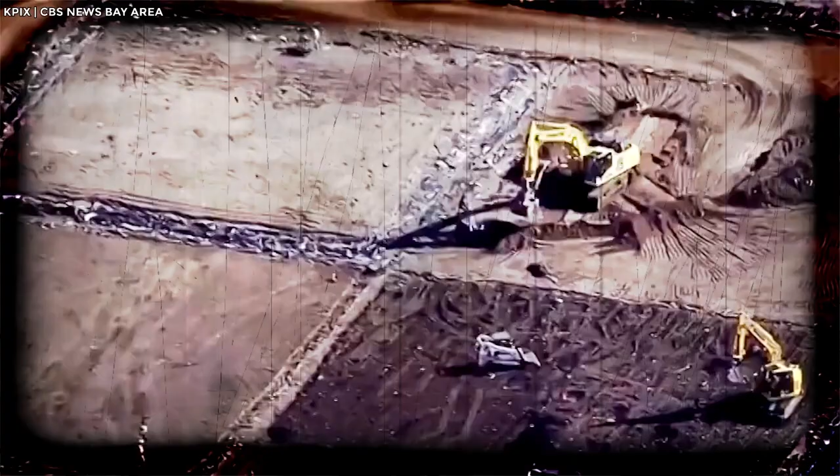San Francisco gets control of the old Hunters Point shipyard. Some of the soil might still contain lingering levels of radiation.

From towering skyscrapers to sprawling infrastructure projects, the world of construction is a testament to human innovation and ambition.

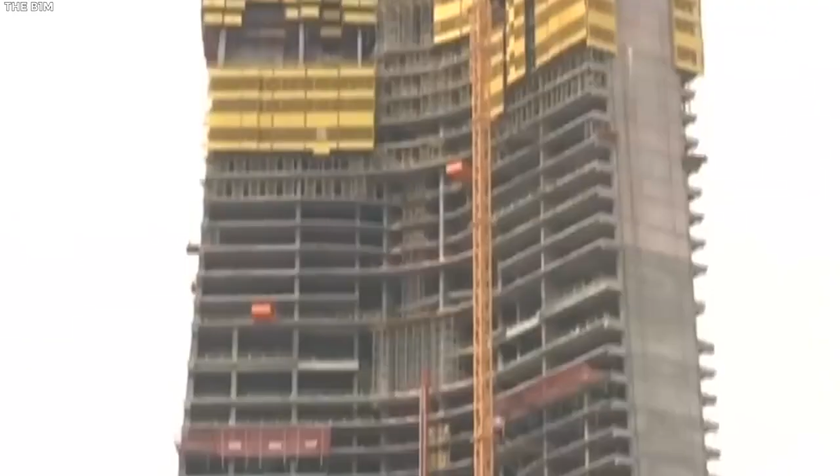But amidst the awe-inspiring achievements lie tales of missteps, oversights, and costly errors. Welcome to our exploration of the 15 biggest construction mistakes in the world.

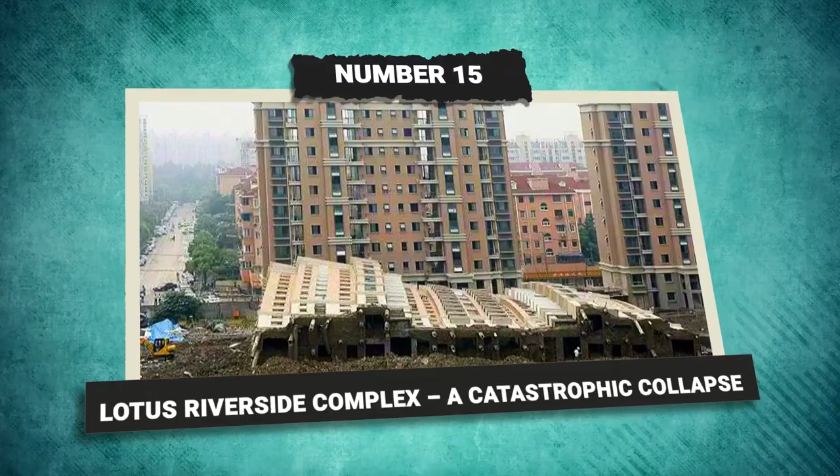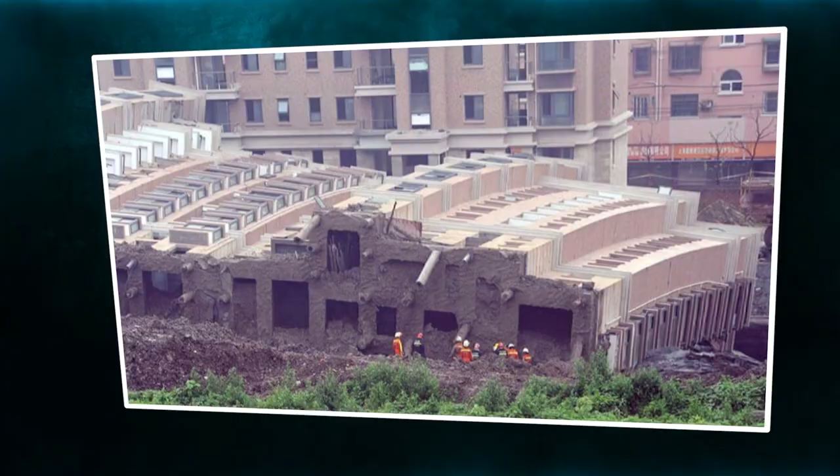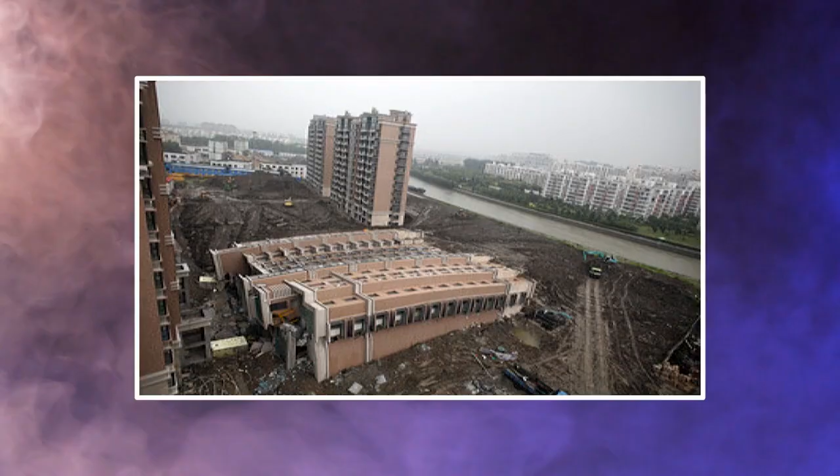Number 15, Lotus Riverside Complex, a catastrophic collapse. At number 15, we have the tragic story of the Lotus Riverside Complex in Shanghai, China. The complex was a symbol of modern urban development, featuring 11 high-rise apartment buildings designed to accommodate hundreds of families, consisting of 11 13-story buildings and 629 units. But on June 27, 2009, one of these buildings came crashing down, sending shockwaves through the construction industry and raising serious questions about safety standards.

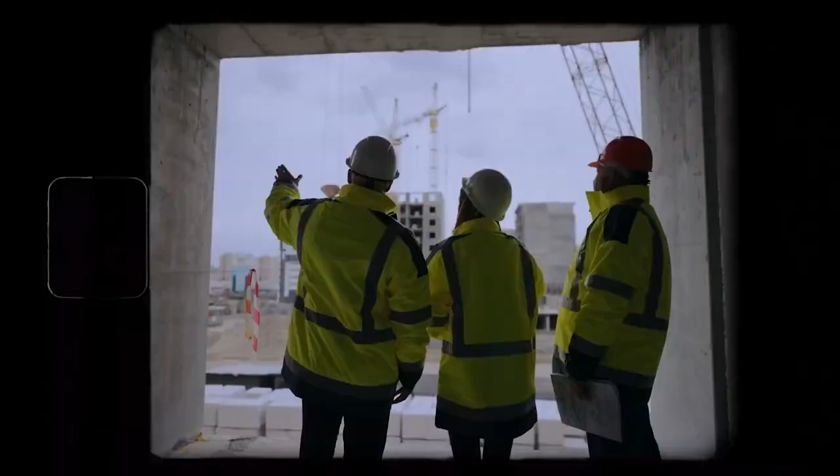In the early morning hours, residents and construction workers were horrified to see Building 7 of the complex topple over completely intact. Remarkably, the structure did not crumble. Instead, it fell over like a toy block, resting on its side in the mud.

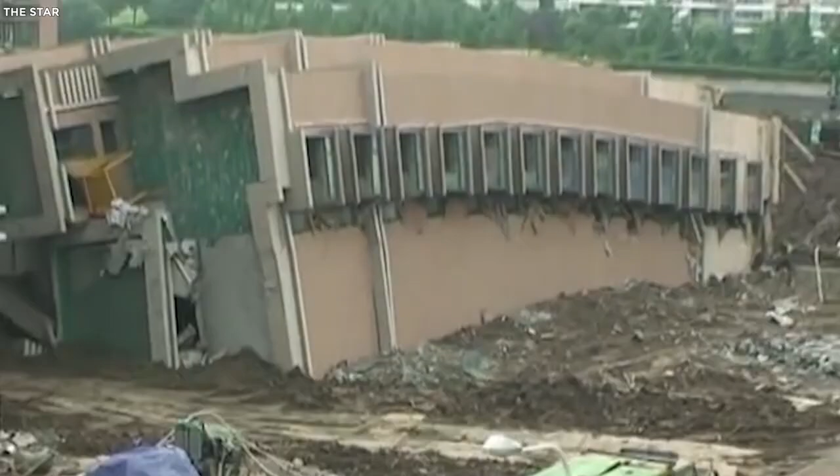Thankfully, the incident happened early enough that most residents were not in the building, and there was only one tragic fatality: a worker who was inspecting the site.

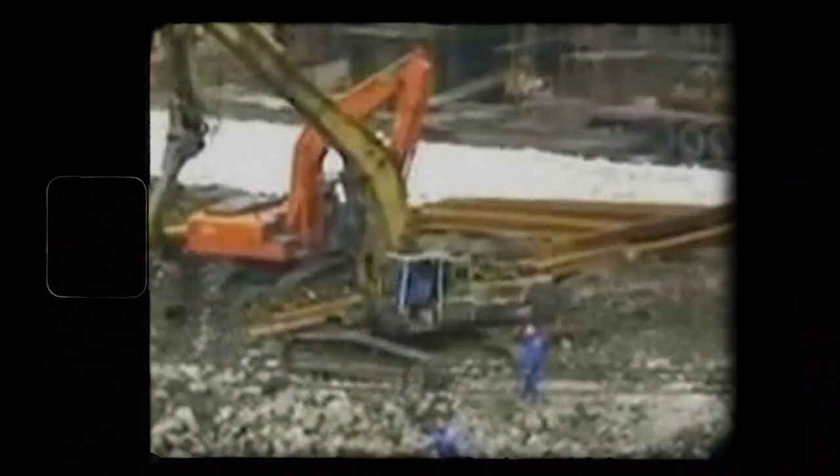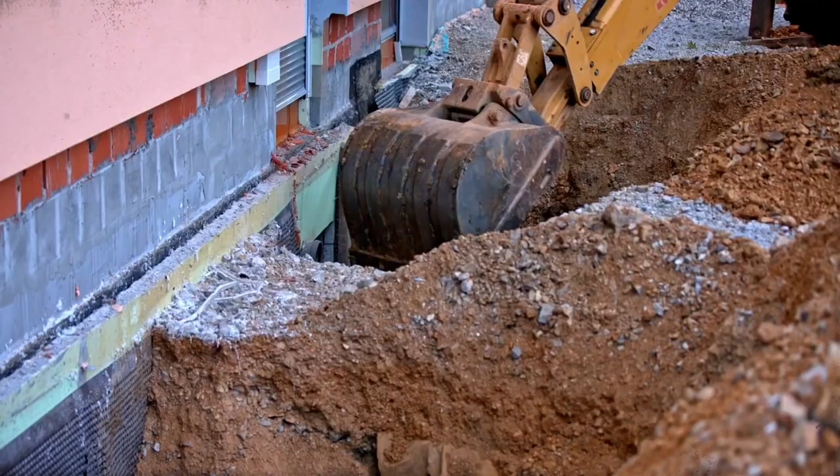The primary cause of the collapse was a combination of poor planning and inadequate construction practices. Investigations revealed that the foundation was improperly prepared, exacerbated by the excavation of an underground garage. The soil removed from this excavation was piled up next to the building, creating uneven pressure. This, combined with heavy rains, weakened the soil underneath, leading to the catastrophic failure.

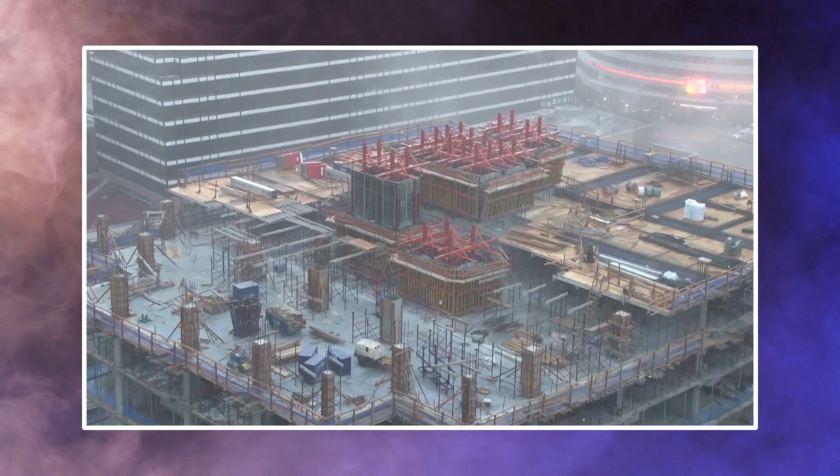Experts criticized the developers for not adhering to basic engineering principles. Proper foundation support and balanced soil displacement are crucial for maintaining the integrity of tall structures. In this case, the lack of oversight and disregard for safety regulations led to an avoidable disaster.

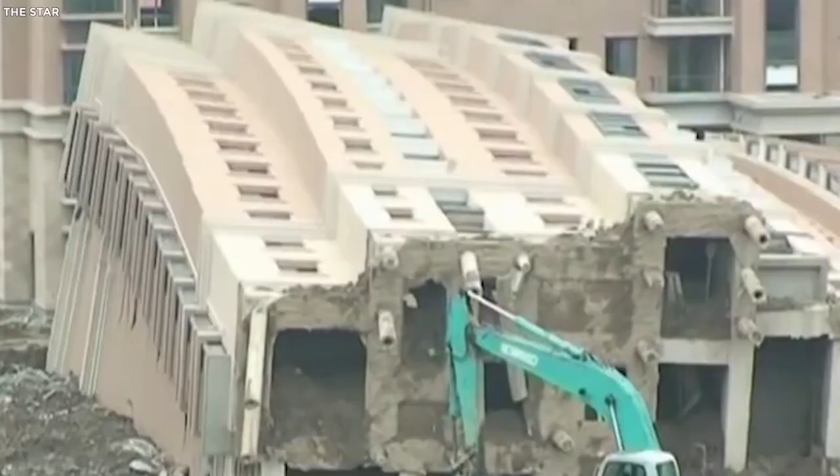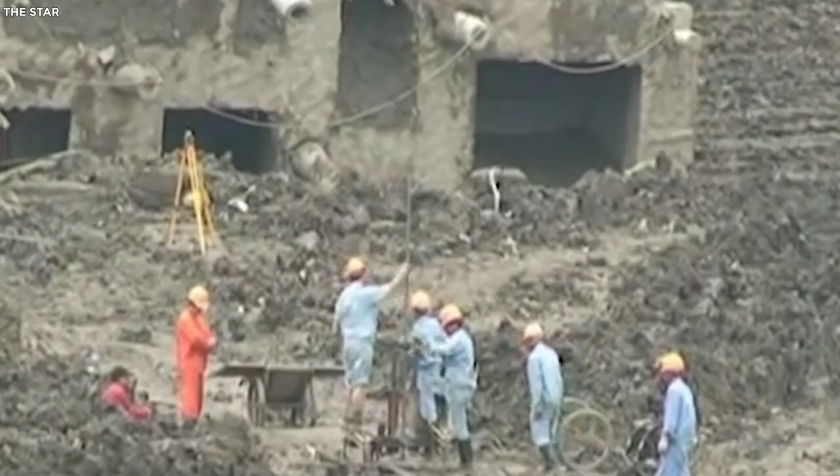In the aftermath of the collapse, the damaged building was demolished, and the remaining structures were reinforced to prevent similar incidents. The Lotus Riverside Complex now stands as a reminder of the importance of diligence and adherence to safety standards in construction. Number 14, the Intempo Skyscraper, a towering misstep.

Coming in at number 14 is the Intempo Skyscraper in Benidorm, Spain. Rising over 650 feet above the coastal town, this eccentric and vaguely M-shaped residential high-rise took nearly 15 years to complete, but its journey was far from smooth.

Construction of the Intempo skyscraper began in 2006, with dreams of transforming Benidorm's skyline and offering luxurious living spaces. However, the project quickly became infamous for its series of blunders and delays, turning what was supposed to be a symbol of modernity into a cautionary tale.

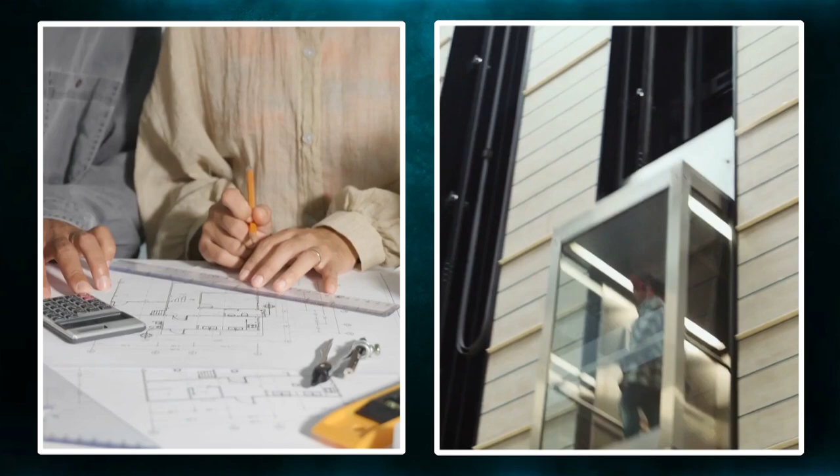The most notorious mistake came to light in 2013 when reports revealed a shocking oversight. The original design plans failed to include an elevator system beyond the 20th floor. In a building with 47 floors, this was an almost unimaginable error. This critical flaw meant that residents in the upper floors would have had to climb over 20 flights of stairs to reach their homes, a glaring flaw for any high-rise, let alone one marketed as a luxury residence.

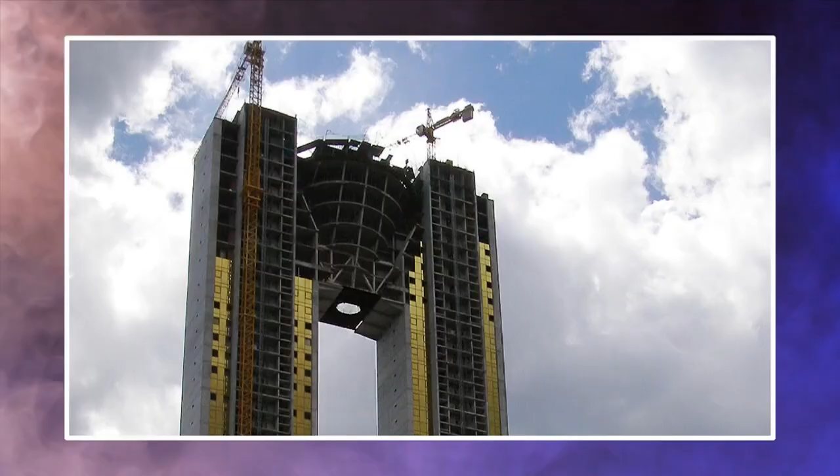The developers were forced to redesign and retrofit the building to include the necessary elevators, significantly increasing costs and delaying the project even further. Despite the setbacks, the Intempo skyscraper was eventually completed and now stands as one of the tallest residential buildings in Europe.

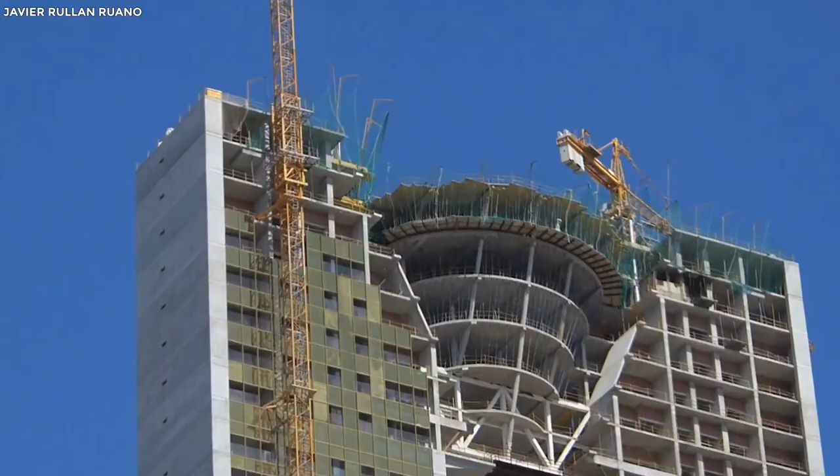Its striking design and panoramic views of the Mediterranean are undeniable, but the building's troubled history serves as a reminder of the importance of meticulous planning and execution in construction.

Number 13, Berlin Aquadome, an aquatic catastrophe. At number 13 on our countdown is the Berlin Aquadome, a magnificent cylindrical aquarium that once captivated visitors with its unique design and marine display.

But in December 2022, this marvel turned into a disastrous spectacle. The Aquadome was a central attraction at the Sea Life tourist site in Berlin, housed within the lobby of the Radisson Blu Hotel. Standing at 25 meters tall and holding 1 million liters of water, it was the largest cylindrical aquarium in the world. Visitors could ride an elevator through the middle of the tank, enjoying a 360-degree view of over 1,500 tropical fish.

However, in the early hours of December 16, 2022, disaster struck. The Aquadome unexpectedly burst, sending a torrent of water gushing into the hotel lobby and onto the street outside.

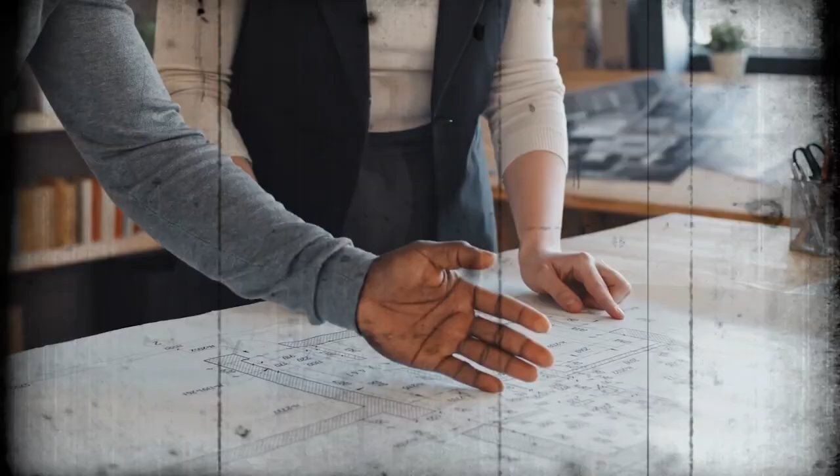The force of the collapse was so intense that it caused extensive damage to the building and left a devastating scene in its wake. The collapse of the Aquadome was both sudden and spectacular, leaving authorities and experts baffled. An investigation was launched to determine the cause of the failure, but despite extensive analysis, the expert report was inconclusive. The precise reason why the tank burst remains a mystery.

The aftermath of the collapse saw a massive cleanup effort, with workers and emergency responders racing to mitigate the damage. Fortunately, the incident occurred early in the morning when the lobby was relatively empty, and there were no serious injuries reported. However, the loss of marine life was significant and heartbreaking.

Number 12: The Leaning Tower of Pisa, an iconic tilt. Next on our list at number 12 is perhaps one of the most famous construction blunders in history, the Leaning Tower of Pisa. This medieval marvel in Pisa, Italy, is renowned worldwide, not for its height or grandeur, but for its unintended tilt.

Construction of the tower began in 1173, and it was intended to be a freestanding bell tower for the nearby cathedral. But almost from the start, the project encountered trouble. By the time the builders reached the third story in 1178, the tower began to lean due to the unstable foundation and the soft, shifting subsoil of Pisa. The soft ground couldn't support the tower's weight, and as a result, it began to lean to one side.

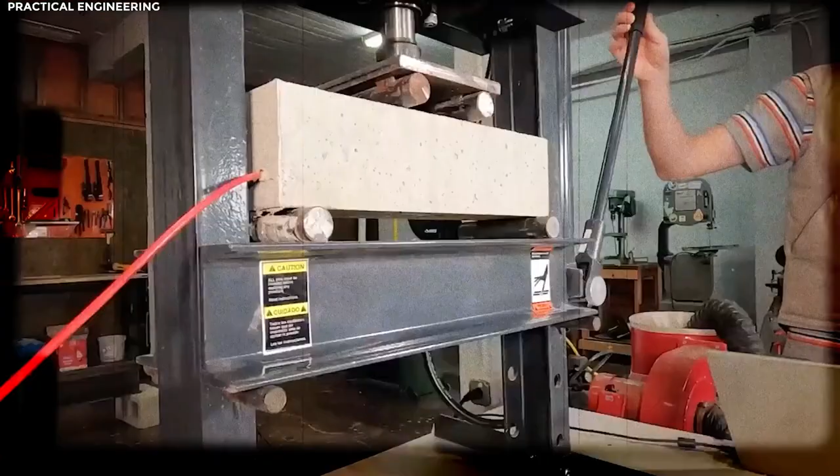For centuries, efforts to correct or stabilize the tilt were unsuccessful. By the late 20th century, the tower leaned a dramatic 5.5 degrees, translating to about 15 feet off the perpendicular. Throughout its history, numerous attempts were made to stabilize the tower. Engineers tried everything from counterweights to complex cable systems. Despite these efforts, the tower continued to tilt. And by the 1990s, it was clear that drastic measures were needed to prevent a complete collapse.

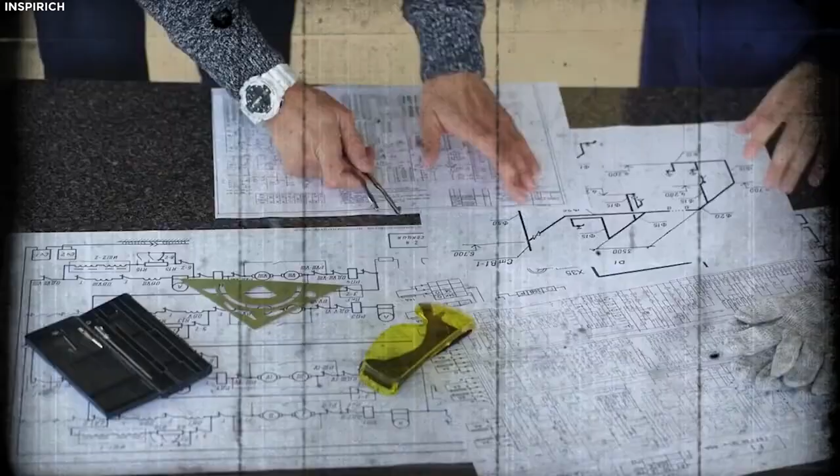In 1990, the tower was closed to the public, and a massive restoration project was launched. Engineers removed soil from underneath the higher side of the foundation, which slowly reduced the tilt to a safer angle. After a decade of meticulous work, the tilt was reduced to about 4 degrees, and the tower was reopened to visitors in 2001. Today, the Leaning Tower of Pisa stands as both a beloved tourist attraction and a testament to medieval engineering, flaws and all. Its tilt, once a symbol of failure, has become a defining feature that draws millions of visitors each year.

Number 11: Sampoong Department Store, a tragic collapse. At number 11, we travel to Seoul, South Korea, to recount the horrific story of the Sampoong Department Store. This disaster, which unfolded on June 29, 1995, left a devastating mark on the country, resulting in the loss of over 500 lives and injuring more than 930 people.

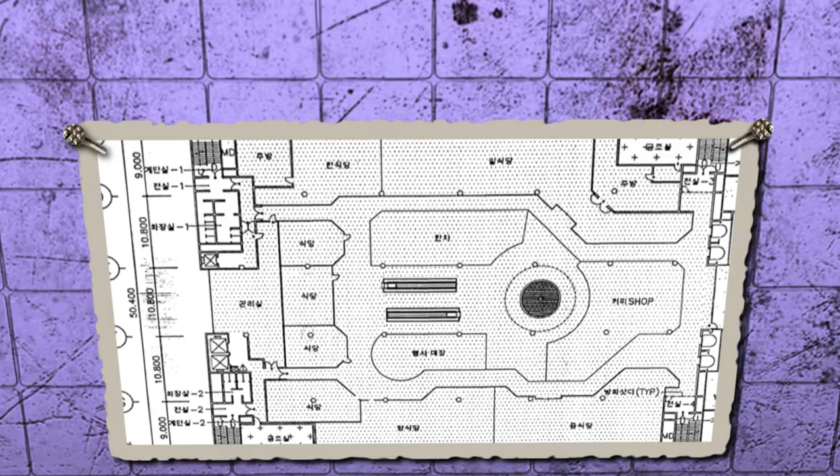The Sampoong Department Store was a symbol of modern commerce and prosperity in Seoul. With its sleek design and diverse array of shops, it attracted thousands of visitors daily. But beneath its polished surface, the building concealed fatal flaws that would lead to one of the deadliest peacetime disasters in South Korean history.

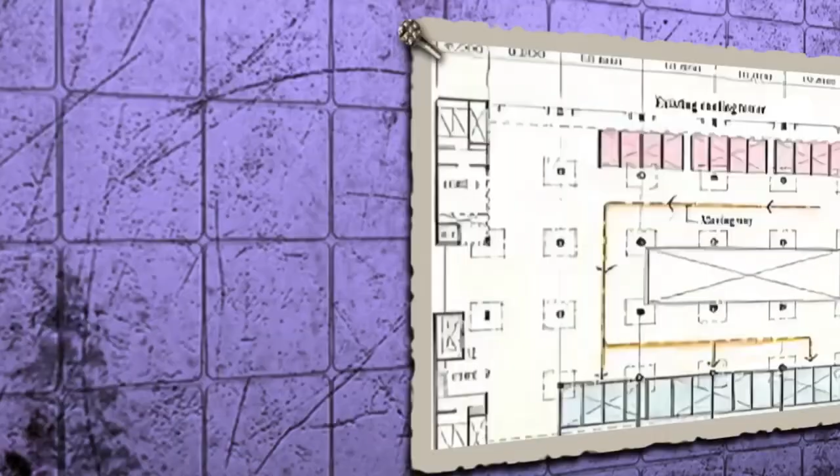The trouble began during the construction phase. Originally planned as an office building, the Sampoong structure underwent significant design changes, transforming it into a department store. These changes included the addition of a fifth floor, which was not part of the original blueprint. Crucially, these modifications were made without adequate reinforcement of the building's structure.

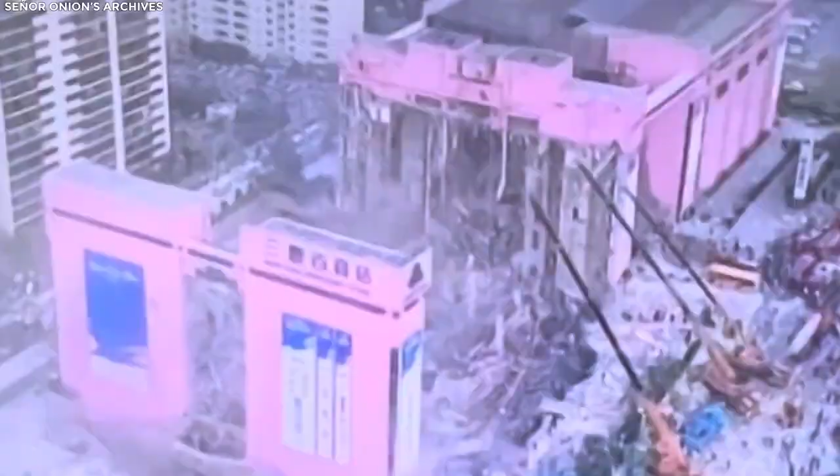In the weeks leading up to the collapse, staff and management noticed cracks forming in the ceiling and walls. Despite these warning signs, the store remained open, and no significant action was taken to address the structural integrity issues. On the fateful day of June 29th, the cracks widened and parts of the ceiling began to fall, causing panic among shoppers. At around 5:57 p.m., the unthinkable happened.

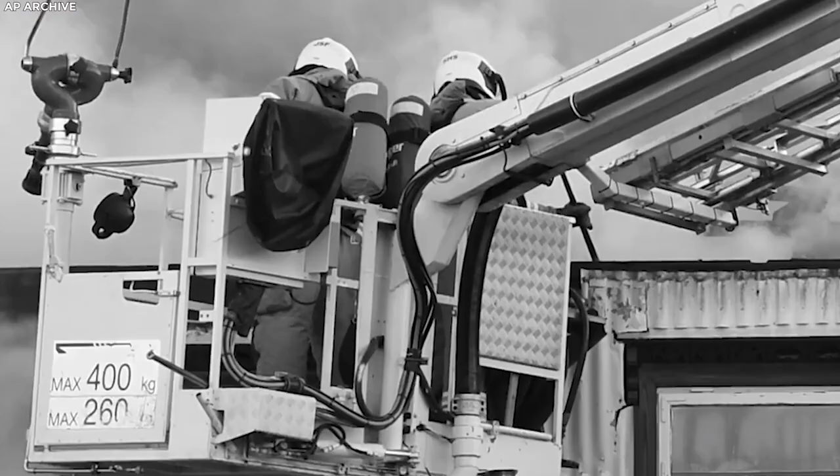The fifth floor gave way, triggering a catastrophic pancake collapse of the entire building. Within seconds, the bustling department store was reduced to rubble, trapping hundreds of people beneath the debris. Rescue operations commenced immediately, but the sheer scale of the disaster made the task incredibly challenging. Rescuers worked tirelessly, often risking their own lives to pull survivors from the wreckage. The final death toll stood at over 500, with more than 930 injured, making it one of the deadliest building collapses in modern history.

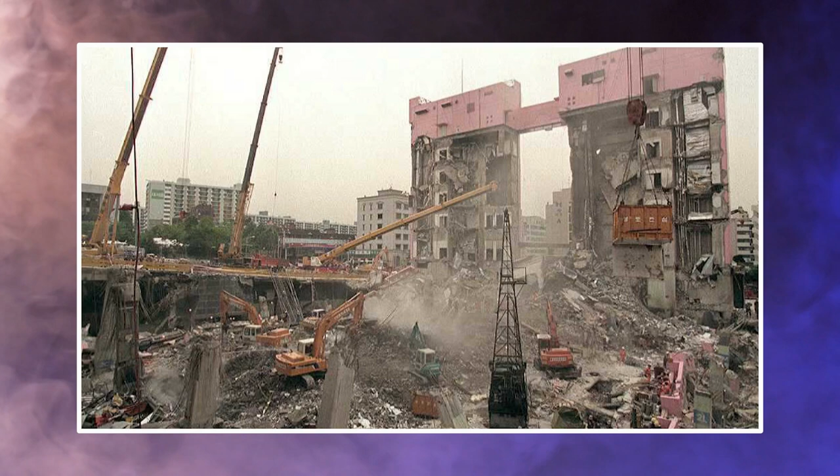To ensure that such a catastrophe does not occur again, South Korea enacted stronger building codes and regulations in the wake of the incident.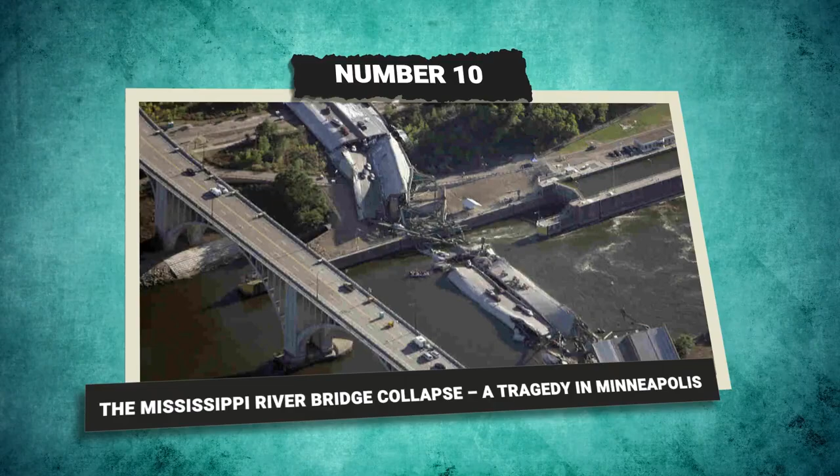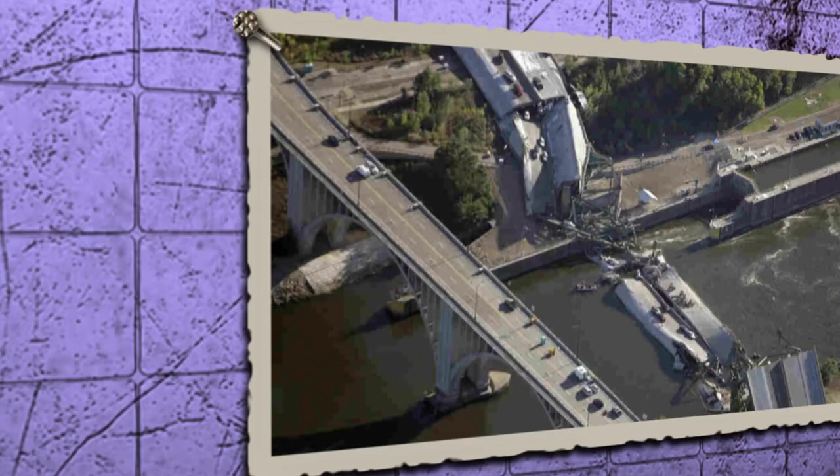Number 10: The Mississippi River Bridge Collapse, a tragedy in Minneapolis. On August 1st, 2007, the Interstate 35W bridge in Minneapolis, Minnesota, collapsed, sending shockwaves through the nation and raising urgent questions about infrastructure safety. During the height of rush hour, the 8-lane bridge, which was carrying bumper-to-bumper traffic, suddenly gave way.

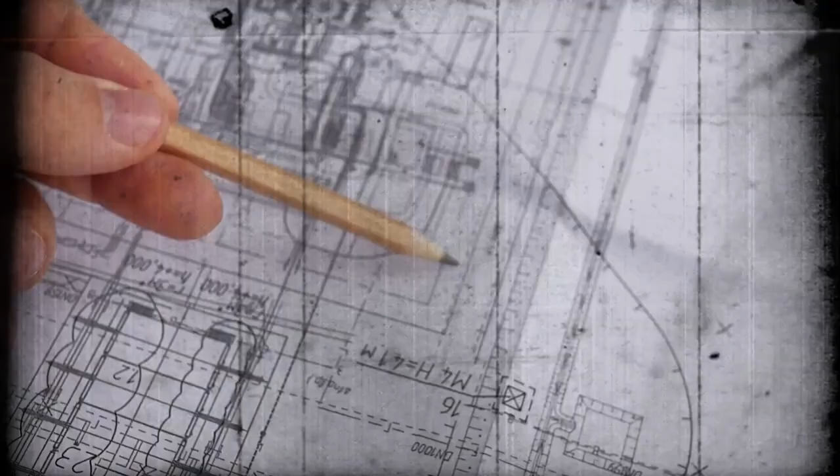Cars, trucks, and even a school bus plummeted into the Mississippi River below, crashing onto the rocky shore. In an instant, 13 lives were lost, and 145 people were injured, many of them suffering serious injuries. The collapse was both shocking and devastating, prompting immediate investigations to determine the cause. The National Transportation Safety Board found that the primary culprit was a design flaw.

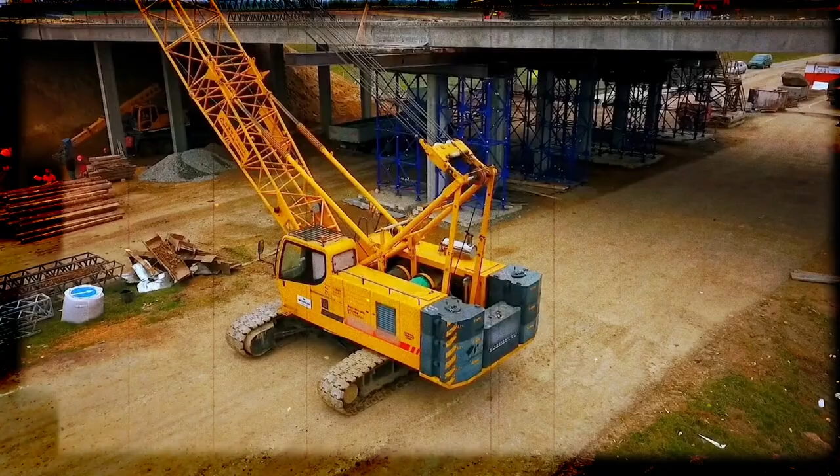Gusset plates, which are crucial components that connect the steel beams of the bridge, were undersized and unable to support the load. Over time, this flaw, combined with the added weight of construction equipment and materials, led to the catastrophic failure. This tragedy exposed the vulnerabilities in America's infrastructure.

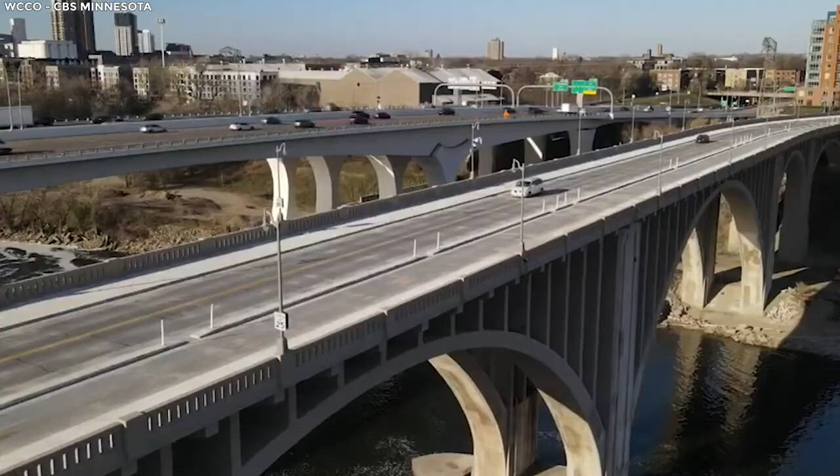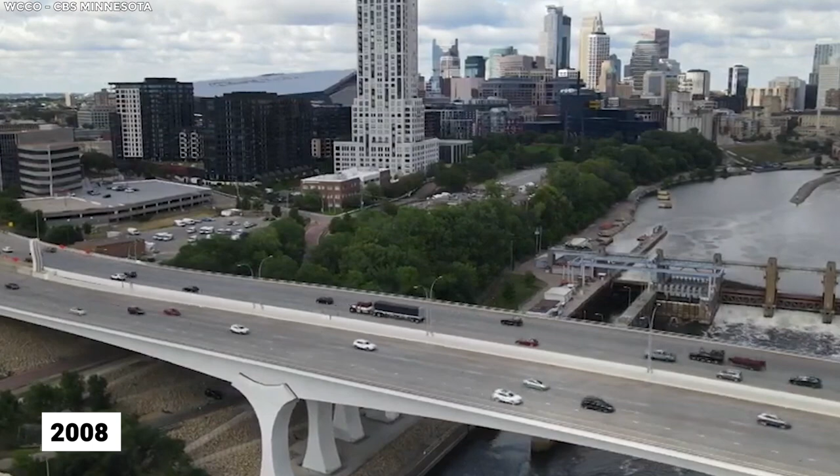Many bridges across the country were built around the same time using similar designs, sparking a nationwide evaluation of bridge safety. In 2008, a new bridge was constructed to replace the fallen one. The new I-35W bridge is not only stronger and safer, but also equipped with state-of-the-art technology to monitor its structural health in real time. This ensures that any potential issues are detected and addressed long before they pose a danger.

Number 9: Falling facade of the Aon Center, marble misstep. Number 9 on our list brings us to the iconic Chicago skyline and the story of the Aon Center. At a time when glass and steel were the staples of modern architecture, visionary architect Edward Durell Stone dared to be different. Stone believed in the timeless elegance of masonry, opting to clad the Aon Center in luxurious Italian Carrara marble. His aim was to convey a sense of strength and permanence that glass buildings couldn't match.

At its completion in 1973, the Aon Center became the tallest marble-faced building in the world. Stone proudly claimed the material was as cost-effective as crumpled aluminum. If only that were true. But the allure of marble came with a heavy price. By 1974, just a year after its grand opening, disaster struck.

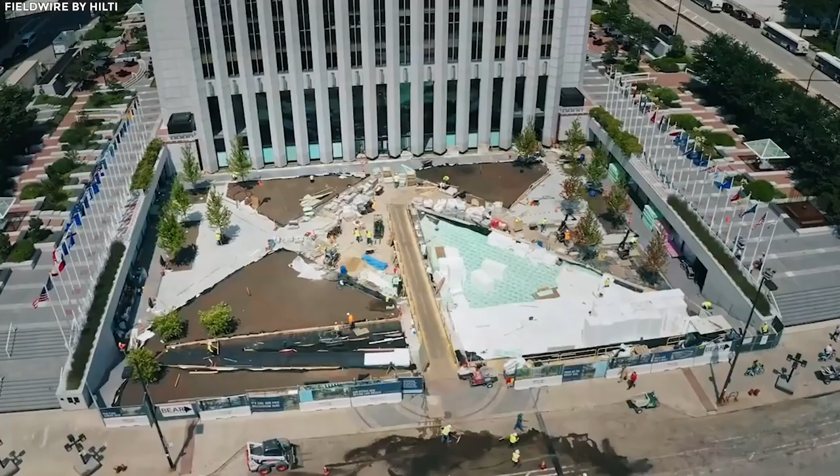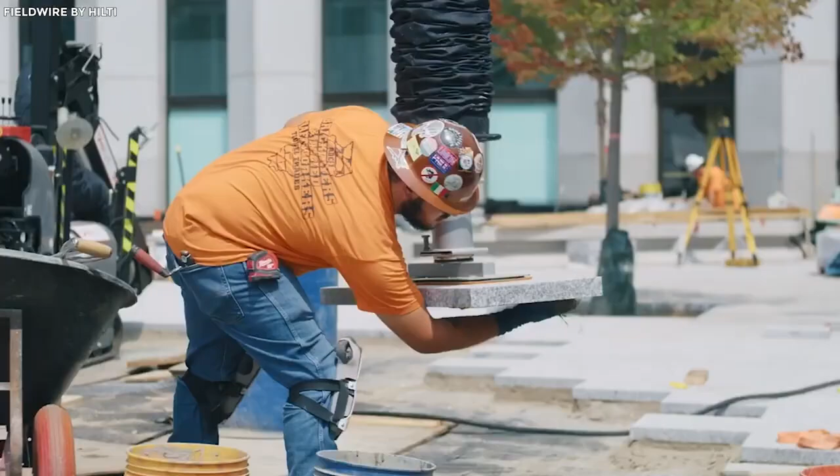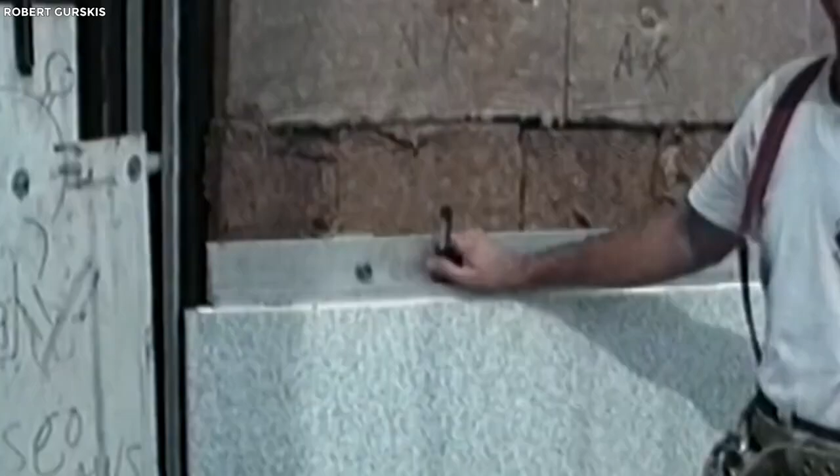A 350-pound slab of marble detached from the 29th floor, crashing onto the Prudential Plaza below. Fortunately, no one was hurt, but this frightening incident exposed a fatal flaw in the building's design. It turned out that the thin marble panels, each only 1.25 inches thick, couldn't withstand Chicago's harsh climate. The repeated cycles of freezing and thawing caused the marble to crack and buckle. Stone's vision of strength and permanence was quite literally falling apart.

To address the issue, the entire facade had to be replaced. Between 1990 and 1992, the building underwent a massive and costly renovation. The marble was replaced with Mount Airy white granite, a material better suited to withstand Chicago's climate. The project cost a staggering $80 million, far exceeding any initial savings from using marble. Today, the Aon Center stands as a testament to the importance of choosing the right materials for the right environment. While it remains a striking feature of Chicago's skyline, it's also remembered as one of the city's biggest building blunders.

Number 8: San Francisco's radioactive problem. Our list takes us to the scenic shores of San Francisco, where a hidden menace lurks beneath the tranquil surface. Behind a nondescript chain-link fence, nestled amid swaying coastal grasses, lies a troubling legacy of the past: a cache of buried radioactive waste and toxic pesticides from a bygone chemical plant. Picture this: a picturesque landscape marred by the specter of environmental contamination.

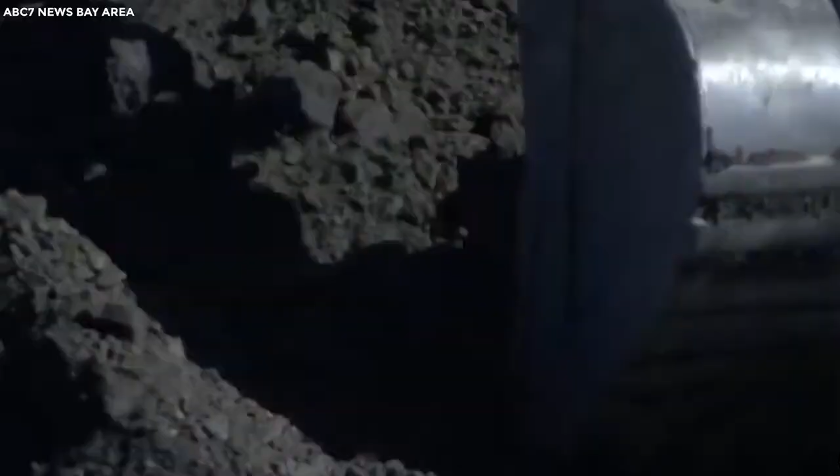The area, once home to a bustling chemical plant, now harbors a dark secret beneath its seemingly peaceful facade. What was once an industrial hub has become a ticking time bomb of hazardous materials, waiting to wreak havoc on unsuspecting surroundings. The buried waste, a remnant of reckless industrial practices, poses a grave threat to both human health and the delicate ecosystem of the San Francisco Bay Area.

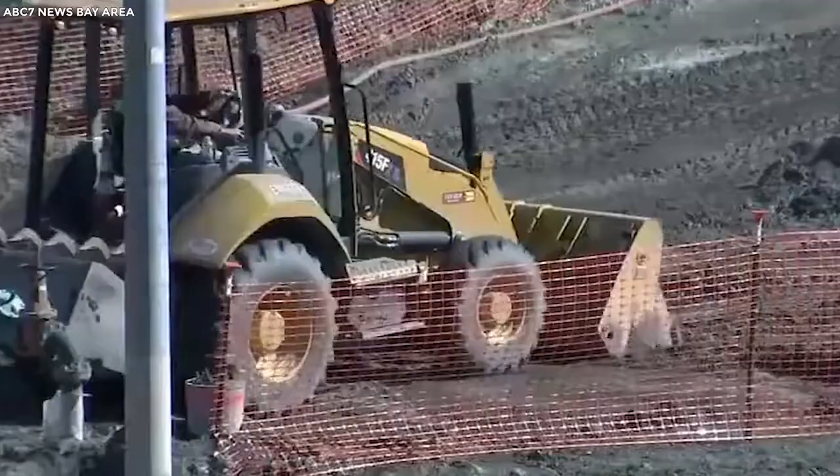Radioactive elements seep into the soil, poisoning the earth, while toxic pesticides leach into the groundwater, tainting precious resources vital for life. Despite efforts to contain the contamination, the legacy of the past continues to haunt the present, casting a shadow of uncertainty over the future of the region.

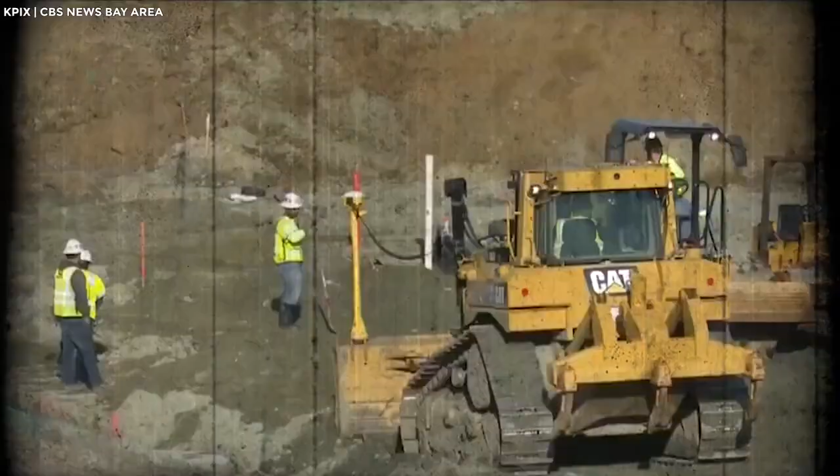The chain-link fence serves as a feeble barrier, unable to conceal the magnitude of the environmental catastrophe lying just beneath the surface. Number 7: South Korea's horrible bridge disaster.

Imagine the hustle and bustle of a busy bridge, cars streaming across, connecting neighborhoods and lives. Now picture that scene shattered by a catastrophic failure. At number 7, we unfold the story of South Korea's Seongsu Bridge.

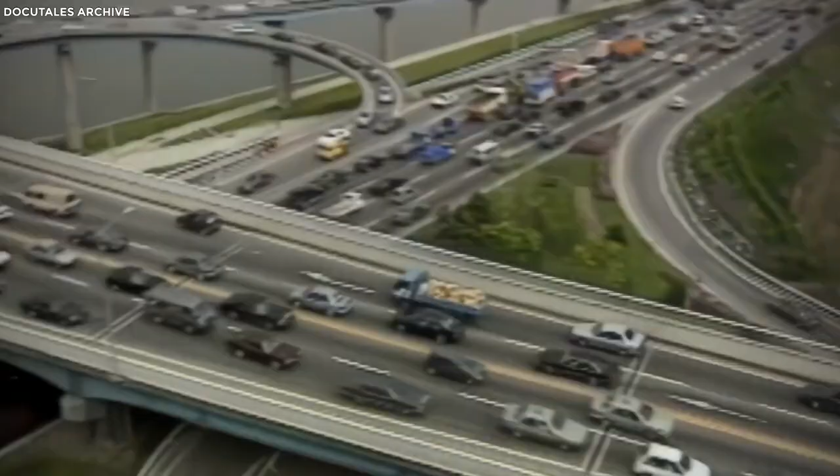The Seongsu Bridge disaster of 1994 stands as one of the most shocking structural failures in South Korean history. The bridge, spanning the Han River in Seoul, was a vital link in the city's infrastructure, carrying thousands of vehicles daily. But on October the 21st, 1994, tragedy struck. Without warning, a section of the bridge gave way during rush hour traffic, plunging cars and their occupants into the river below. The devastation was swift and horrific.

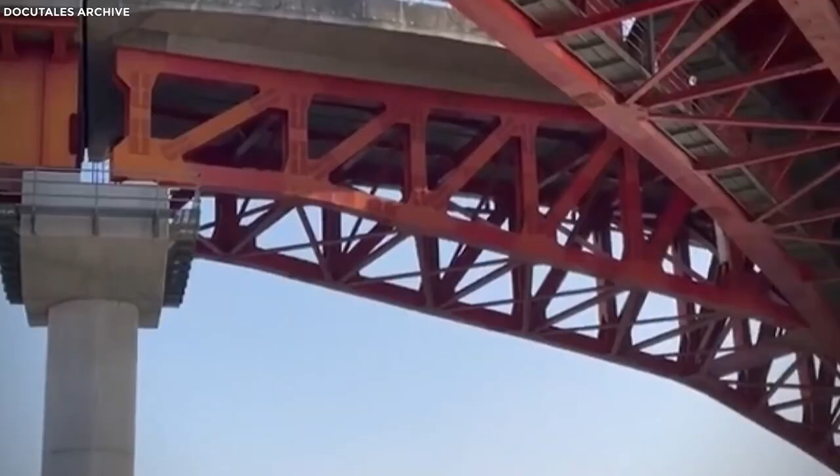The exact cause of the collapse was later determined to be a combination of factors, including structural deficiencies and inadequate maintenance. Years of heavy traffic and exposure to the elements had taken their toll on the aging bridge, weakening its supports and compromising its integrity. The Seongsu Bridge tragedy sent shockwaves through South Korea, prompting a nationwide reassessment of infrastructure safety standards. It served as a grim reminder of the consequences of neglecting maintenance and overlooking structural flaws.

Number 6: 20 Fenchurch Street. At number 6, we explore the fateful destruction of 20 Fenchurch Street of London. Designed by Rafael Vinoly Architects and completed in 2014, 20 Fenchurch Street was envisioned as a beacon of modernity and energy efficiency. Standing tall in the city of London, this high-rise was supposed to be a shining example of sustainable architecture in a compact urban setting.

But as fate would have it, the walkie-talkie quickly gained notoriety for all the wrong reasons. In 2013, during the building's construction phase, reports started surfacing about an unexpected side effect of its unique curved design. It acted like a giant concave mirror, reflecting and concentrating sunlight onto the streets below.

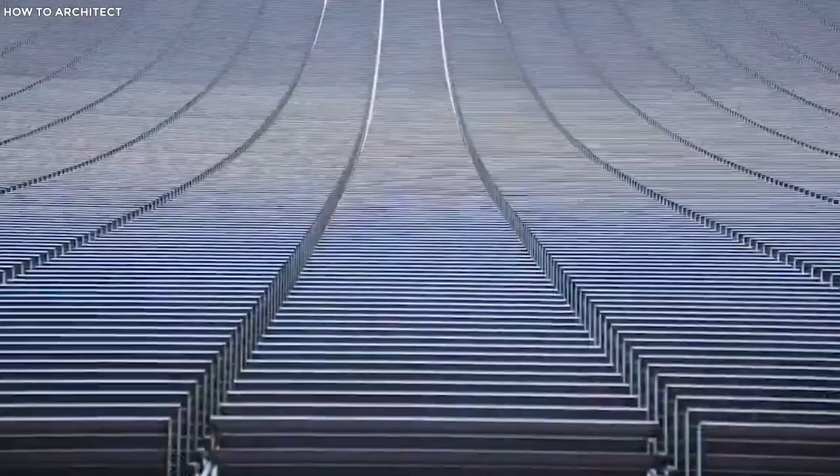Dubbed the 'fry an egg skyscraper,' the walkie-talkie's reflective surface caused temperatures to soar, melting cars, blistering paintwork, and even frying eggs on nearby sidewalks. It was like something out of a science fiction movie. But unfortunately, it was all too real for the people of London.

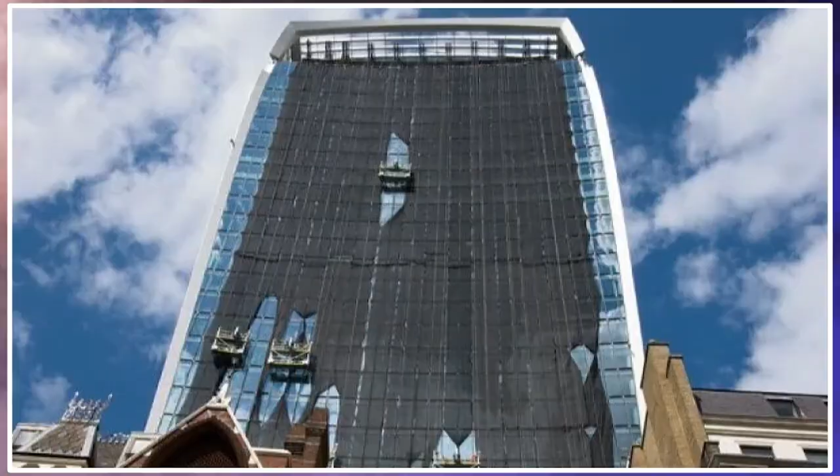Measures were implemented to mitigate the glare, including installing sunshades and modifying the facade. It was a costly and embarrassing setback for all involved. Despite the initial hiccup, the walkie-talkie has since been modified to reduce its reflective glare, and it continues to stand as a prominent fixture in London's skyline. But its legacy serves as a cautionary tale about the importance of considering all potential consequences in architectural design.

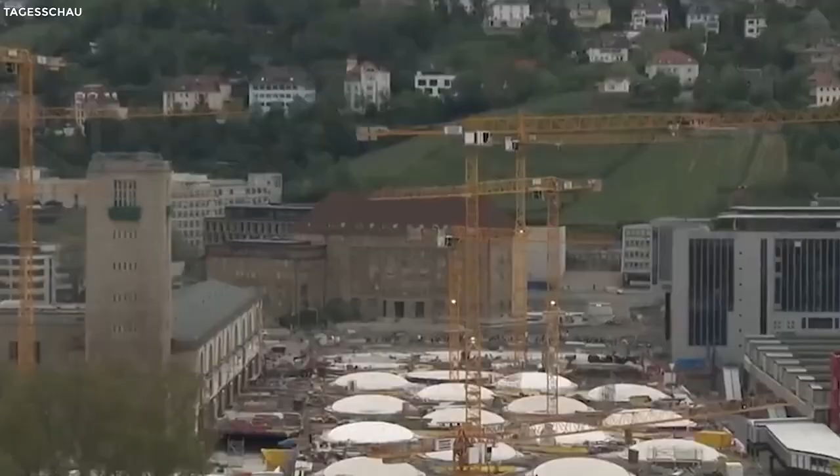Number 5: Stuttgart 21. Let's fast track to Stuttgart, Germany, where the ambitious Stuttgart 21 project rolls in at number 5 on our list of construction mishaps.

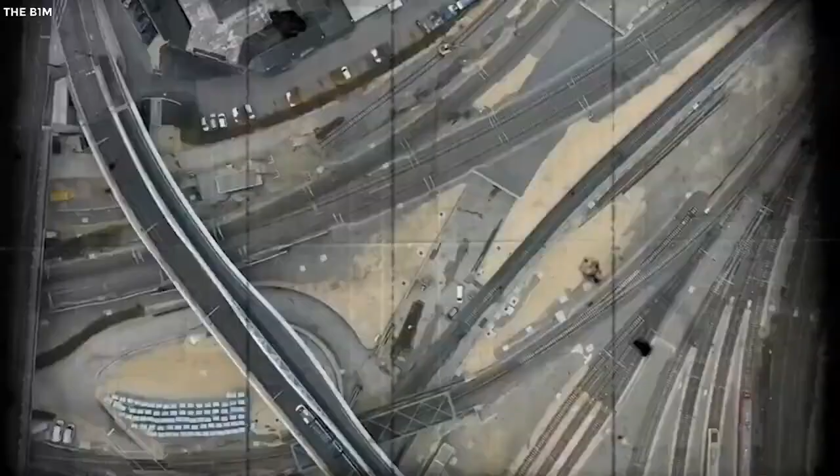Originating in 1994, this endeavor aimed to revamp the city's railway infrastructure, promising smoother operations and enhanced connectivity for the bustling metropolis. The concept was bold: replace the aging Stuttgart Hauptbahnhof main station with a modern underground terminal, reconfigure rail lines, and streamline connections to other major European cities. Sounds like a commuter's dream, right?

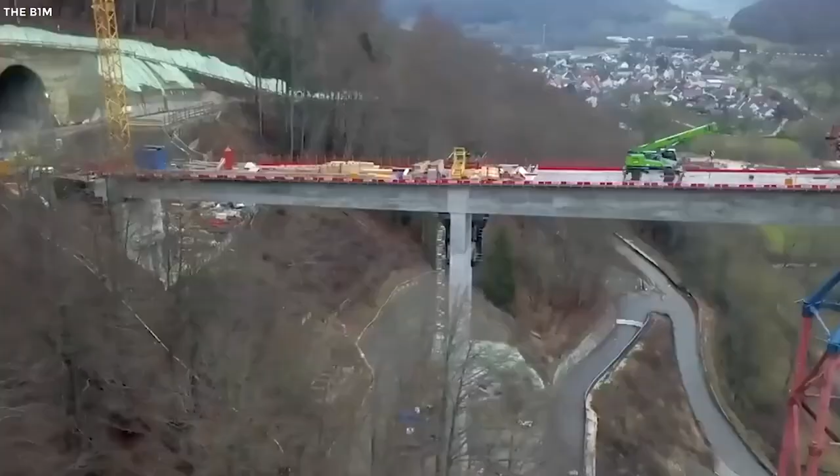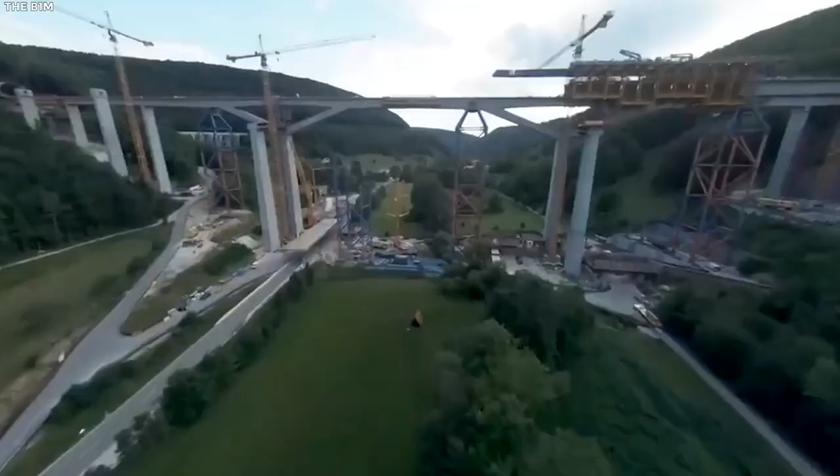Well, not quite. What started as a vision for progress soon morphed into a saga of controversy and public outcry, and urban planners raised alarm bells over its potential environmental impact, escalating costs, and disruption to the city's historic landscape. Critics argued that the project's environmental assessments were inadequate, pointing to the potential destruction of green spaces and ancient trees in the city center. Moreover, ballooning costs and delays fueled skepticism among taxpayers, who questioned whether the benefits would outweigh the financial burden. As construction progressed, so did the tension.

Protests intensified, with activists staging sit-ins and demonstrations to halt the project's momentum. The clash between proponents of progress and defenders of tradition turned Stuttgart 21 into a symbol of civic resistance and grassroots activism. Number 4: Citigroup Center.

Moving to number 4, the Citigroup Center in New York stands as a testament to architectural innovation, with its distinctive design, including a daring cantilever and a striking sloping crown. This iconic tower commands attention, but behind its impressive facade lies a story of near disaster. The Citigroup Center's most distinctive feature is its cantilever design, supported by 4 massive stilts, perfectly centered on each side.

This daring architectural choice allowed the building to extend an impressive 72 feet over the sidewalk, creating a striking visual presence in the heart of Manhattan.

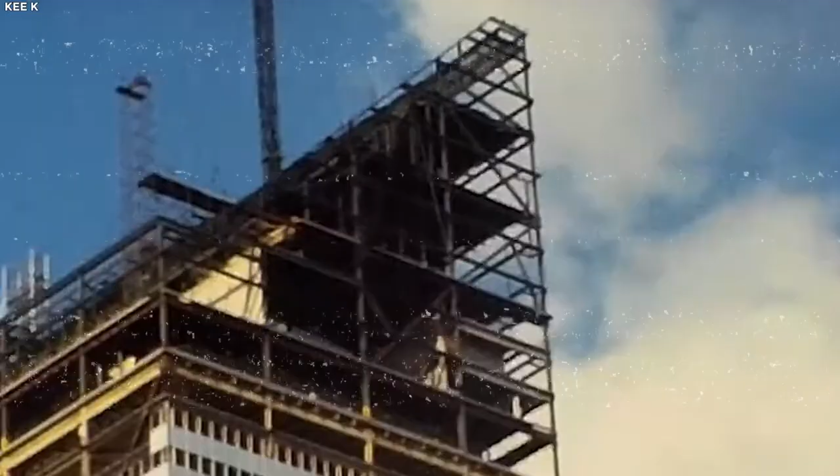In fact, if a powerful storm were to hit New York City, the Citigroup Center could have collapsed like a house of cards. Thanks to a daring engineering solution known as Project Serene, the Citigroup Center was reinforced with massive steel braces and tuned mass dampers, ensuring its stability even in the face of powerful winds.

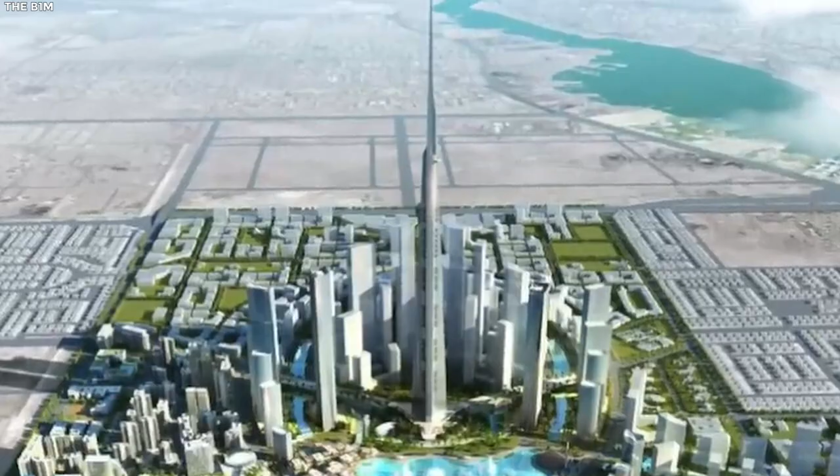Number 3, Jeddah Tower. This is about the unfinished story of Jeddah Tower. For over 15 years, the Jeddah Tower has been a work in progress, with construction periodically halting due to various setbacks.

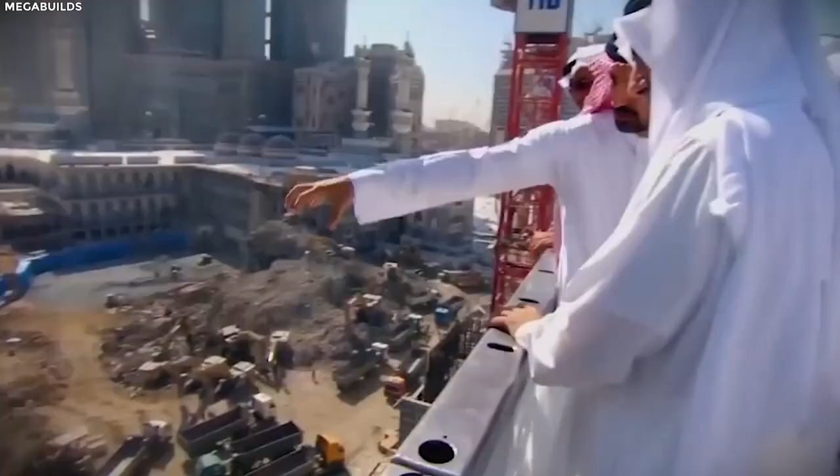One of the most significant obstacles came in the form of a corruption purge by the Crown Prince of Saudi Arabia. Amidst political upheaval, the project was put on indefinite hold, casting doubt on its future and leaving investors and developers in limbo. The development halt was further compounded by labor disputes with a contractor, stemming from the turbulent aftermath of the Saudi Arabian purge.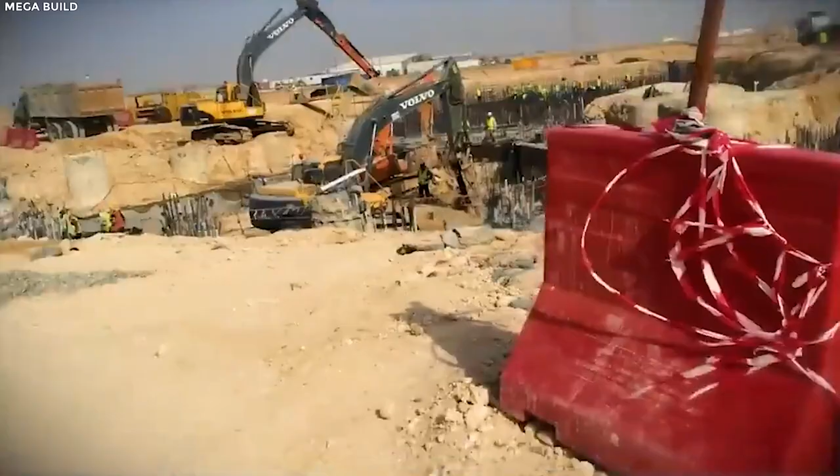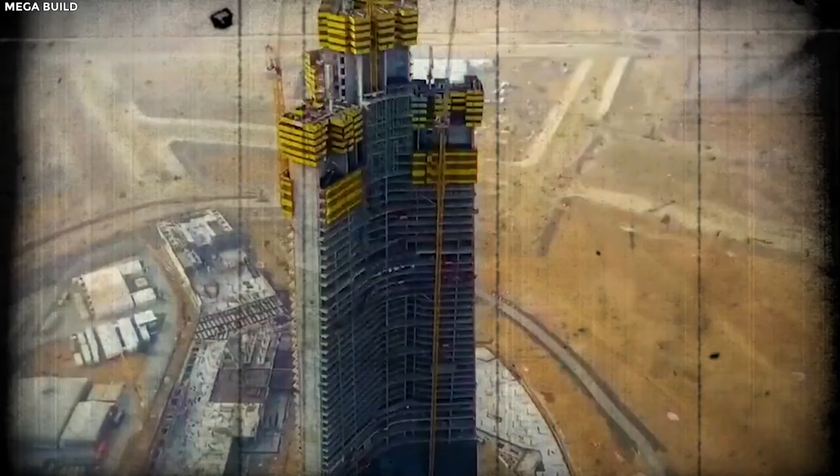These challenges not only delayed construction, but also raised concerns about the tower's viability and safety standards. Despite the hurdles, there's hope on the horizon. Construction on the Jeddah Tower has been resumed in 2023, signaling a renewed commitment to seeing this architectural marvel through to completion.

Number 2, Berlin-Brandenburg Airport. It was supposed to be a beacon of modernity for the German capital, but became a symbol of bureaucratic bungling and engineering incompetence. Conceived in the heady days of reunification, the Berlin-Brandenburg Airport project dragged on for a staggering 3 decades, with 7 missed opening dates punctuating the ordeal, each one more embarrassing than the last.

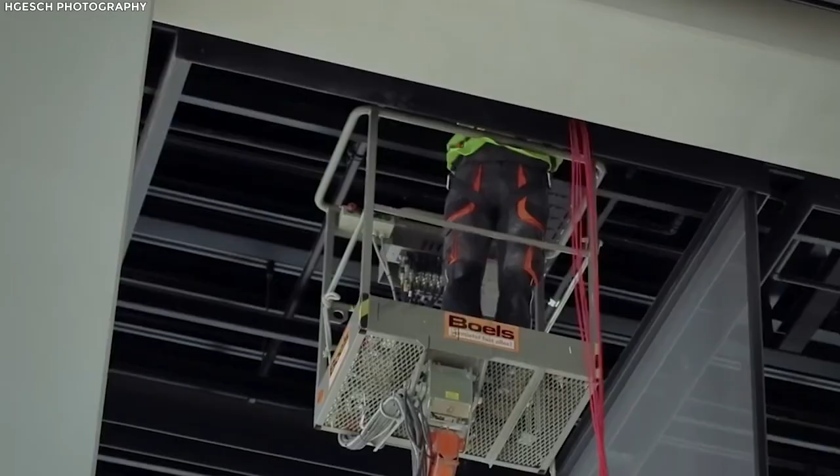But it was the fateful June 3rd, 2012, that etched itself into the public consciousness. With great fanfare, Berliners anticipated the grand unveiling of their gleaming new airport. Instead, they encountered a litany of horrors, including faulty fire safety systems, crooked automatic doors, and roofs that were about to collapse. Inspectors uncovered a staggering 120,000 defects, with over 170,000 kilometers of dangerously wired cable weaving through the infrastructure.

Lights flickered, refusing to obey commands, while others stubbornly stayed lit, oblivious to the chaos around them. For over 9 agonizing years, a revolving door of high-paid executives grappled with the Herculean task of fixing the mess. But just as the finish line appeared within reach, fate dealt a cruel blow in the form of a global pandemic, grounding the aviation industry to a standstill.

Yet, against all odds, the day finally arrived. After almost a decade of delays and despair, Berlin-Brandenburg Airport opened its gates to the world. But with air travel in turmoil and uncertainty looming large, the triumphant moment felt bittersweet.

Number 1, Sydney Opera House. First and the last, the Sydney Opera House. But behind its stunning sails and grandeur lies a tale of budgetary woes and unforeseen challenges. The Sydney Opera House isn't just a masterpiece of architecture, it's a bustling cultural hub that hosts a diverse range of performances, from ballet to contemporary dance, and, of course, breathtaking opera productions. However, its journey to completion was far from smooth sailing.

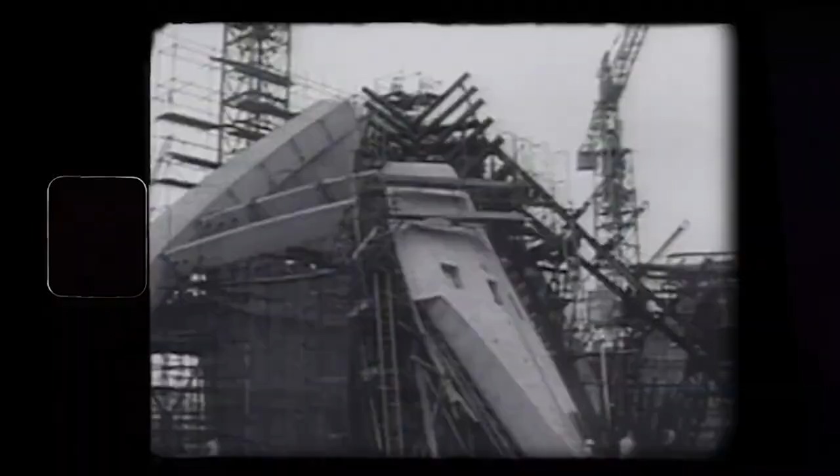One of the primary reasons for the initial failure of the Sydney Opera House project was the lack of a defined project budget. With no finalized design in place, the project commenced without a clear understanding of its financial scope. This lack of clarity proved to be a costly mistake. Almost immediately after construction began, costs began to skyrocket. Change orders and unforeseen challenges such as incorrect site surveys led to further budget overruns. What was initially envisioned as a grand architectural endeavor turned into a financial nightmare.

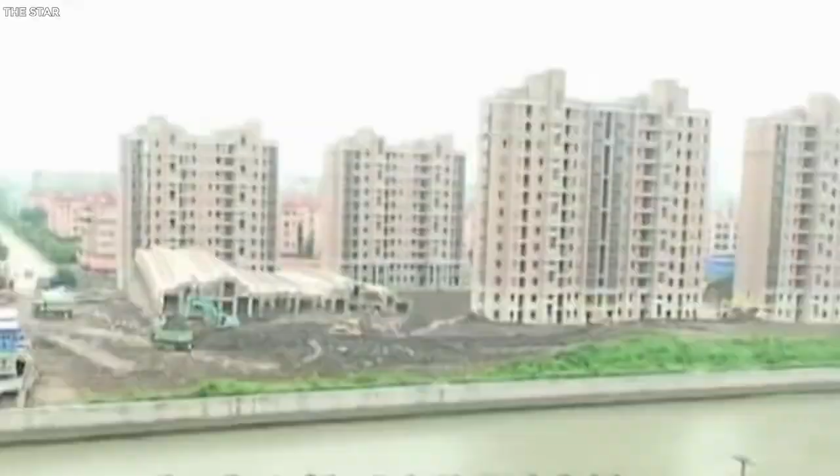All of these major errors in the construction let us learn one thing, which is to be cautious from the beginning of the plan.